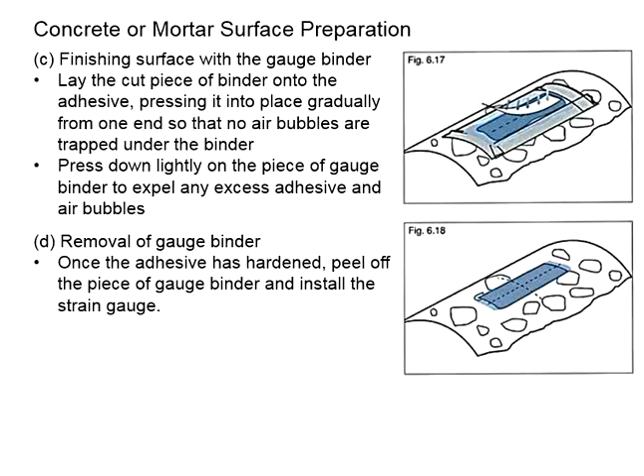Second, you will need to prepare a pre-coating surface on the concrete. We discussed how to apply the pre-coating using PS adhesive in our previous videos. The purpose of the pre-coating is to provide a nice surface for the strain gauge to bond with, and also to serve as a barrier against dampness coming from the surface of the concrete to the underside of the strain gauge.

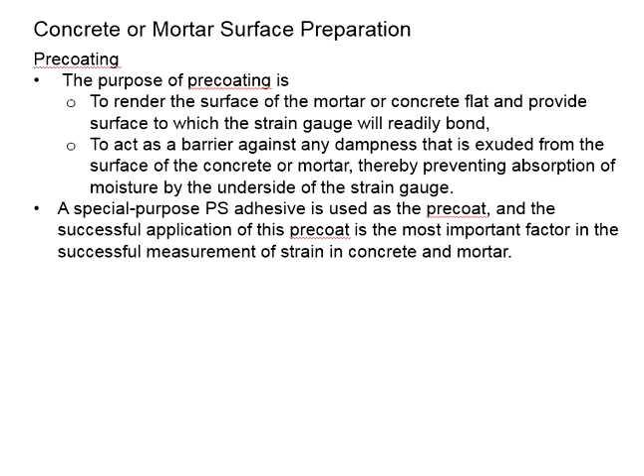This is to prevent the absorption of moisture by the strain gauge. Knowing that you are testing the specimen under outdoor conditions, the specimen is exposed to the environment. As a result, this pre-coating is nearly inevitable. You will have to provide the pre-coating onto the surface of the test specimen.

Now that you have the pre-coating surface ready, you may install the strain gauge using the RP adhesive. Apply a thin layer of adhesive uniformly over the back of the strain gauge, then apply pressure until the adhesive hardens. Next, it will be bonding the connecting terminals.

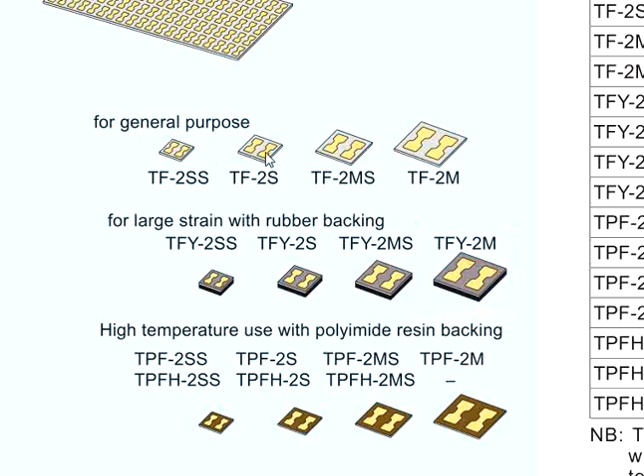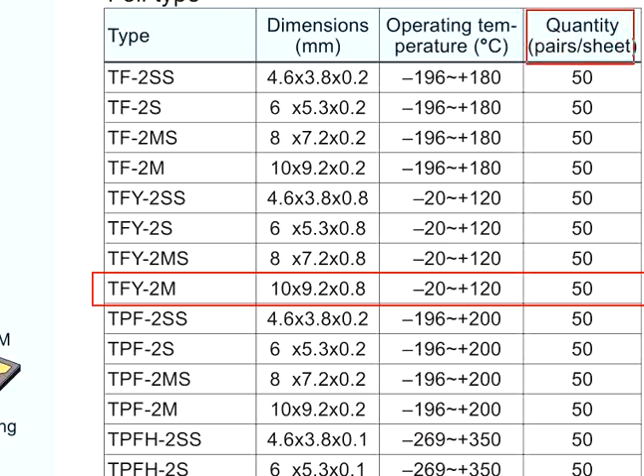If you look at the type of connecting terminal, it is stated as TFY 2M. This TFY 2M is a typical connecting terminal with rubber backing. The dimensions, operating temperature, and quantity per sheet are given here. It normally comes in one piece, and there are 50 units of connecting terminals per single sheet.

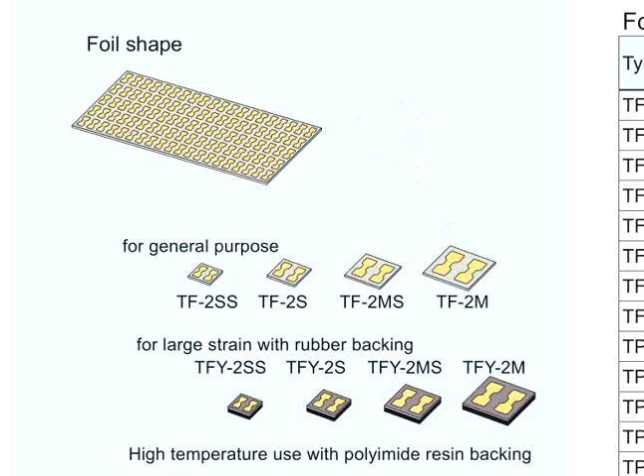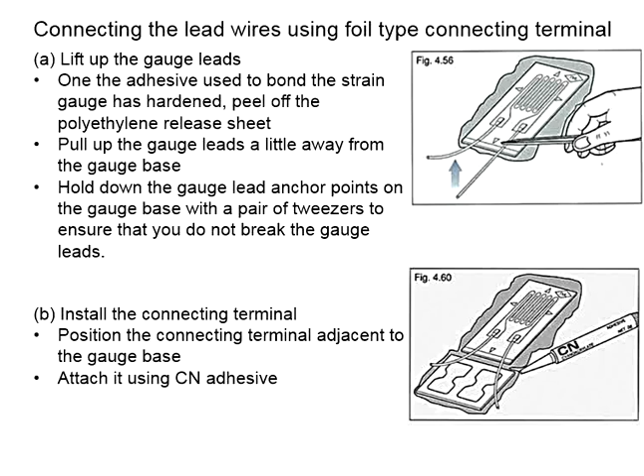Now you need to install the connecting terminals. We have discussed joining the strain gauge with the connecting terminal in our previous videos. You may refer to those videos.

Basically, you may use CN adhesive to have the connecting terminal attached on the pre-coated surface, where you're going to do soldering later, connecting the strain gauge to the connecting terminal, and then joining with the lead wire.

Once you've done the soldering work, you may perform an intermediate check. This intermediate check includes checking the strain gauge resistance using a tester, in order to see if the connections with the connecting terminals are properly done. And then checking the insulation resistance.

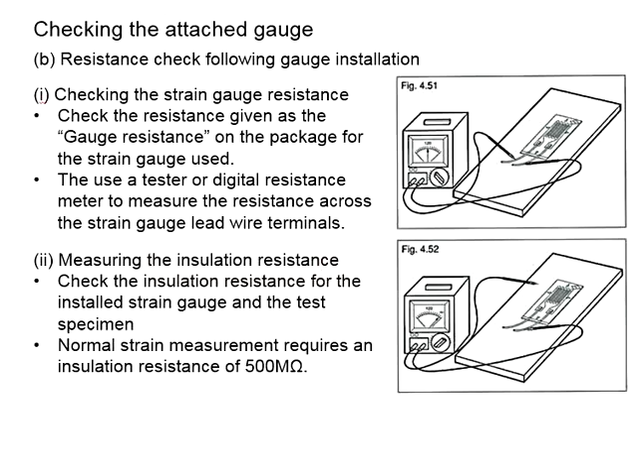Since concrete is not an electric conductor, this shouldn't be an issue. The intermediate check also includes checking the quality of soldering. Do not leave any protruding lead wire. Make sure there is sufficient solder applied onto the connecting terminal, and also make sure all flux deposits are removed. Then check if there are any problems with the connecting terminals.

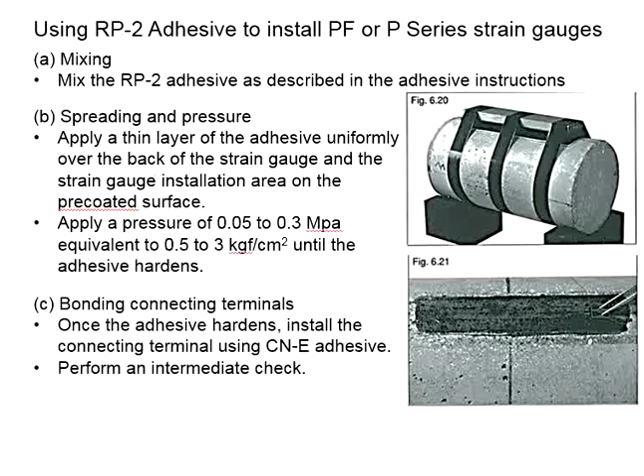Once you've done the installation of the strain gauge as well as the connecting terminals, now you will need to apply coating in order to isolate the strain gauge from moisture.

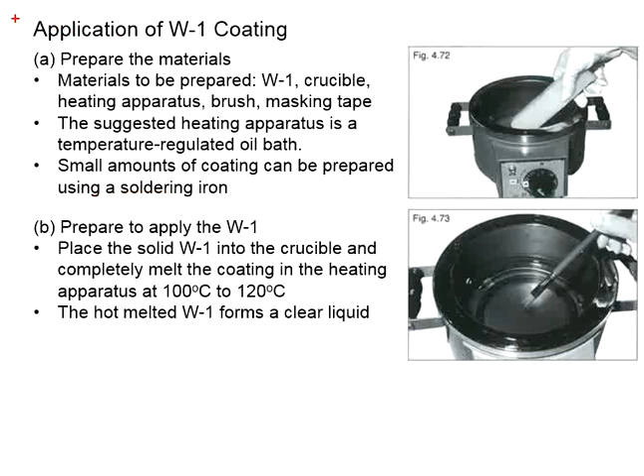You will need to apply the first coating as W1. The process or application of W1 coating we have discussed in our previous videos. You will need to cover this W1 coating over the strain gauge, the connecting terminal, the adhesive, and also the lead wire where it joins.

It is not just only on the surface of the strain gauge, as any part of those, once exposed to moisture, will lead to an influence on the measurements of the strain gauge.

The coating should extend out roughly 5 mm from the strain gauge and the connecting terminal, but should not extend beyond the pre-coating, as the pre-coating prevents moisture coming from the surface of the concrete or mortar. You will have to keep everything in between the pre-coating and the W1 coating.

Let's say now your W1 coating extended beyond the pre-coating. That means moisture can still enter and reach the strain gauge through underneath the concrete surface at the regions without pre-coating, even though you have already applied the W1 coating on top of it. Moisture can still leak through in between the W1 and the pre-coating gap.

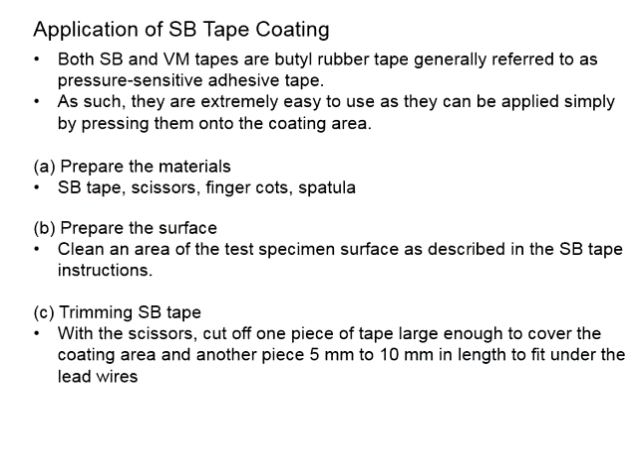Next, you will need to apply a layer of SB tape. We also talked about the application of SB tape coating in our previous videos. The application of SB tape coating should comprise 2 pieces.

A smaller piece should be laid underneath the lead wire, while a larger piece should be laid over the strain gauge, connecting terminal, as well as the lead wire. The SB tape laid underneath the lead wire is very important because this could be the area where moisture can leak into the strain gauge if there is any gap underneath the lead wire.

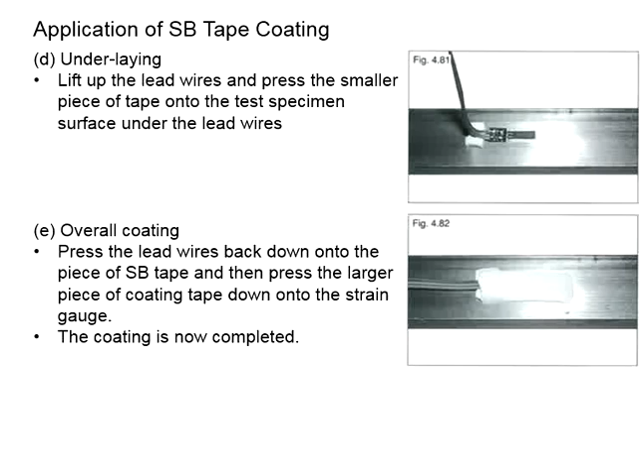Now you cut a piece of SB tape with the size of about 5 mm. Press it down onto the side of the connecting terminal from which the lead wire extends. Then you may do some soldering of the lead wire to connect it to the connecting terminal.

As you have already applied W1 over the connecting terminal, theoretically it has already been coated with W1. It doesn't matter, as W1 coating is sensitive to temperature. Under high temperature, beyond 60 degrees Celsius, it starts to liquefy. You may do the soldering over the W1 coating on the connecting terminal, and it should easily melt during the heating of the soldering iron.

After you're done soldering, you may reapply the W1 coating. If there are any portions of the lead wire or connecting terminals not covered by the coating, you may reapply a coating of W1. Once you've done the coating for the W1, you may use the SB tape to cover up everything.

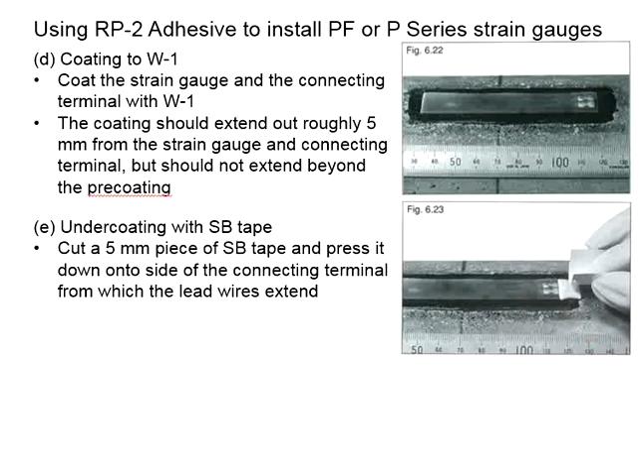Reapply a few layers of W1 coating and then cover everything with SB tape. Make sure you have a smaller piece of SB tape also underneath the lead wire, which you can prepare upfront before you do the soldering process.

Now you have covered everything with SB tape. You will need to provide a final coating by using the VM tape. You will need to cut a piece of VM tape slightly larger than the layer of SB tape coating and press it down in place.

Again, the VM tape will have to come in one whole piece instead of several smaller pieces. This is to ensure there is no gap or joint in between different pieces of VM tape, and properly press it down in place so there is no gap for possible leaking of moisture reaching the strain gauge. Lastly, you will need to perform a final check.

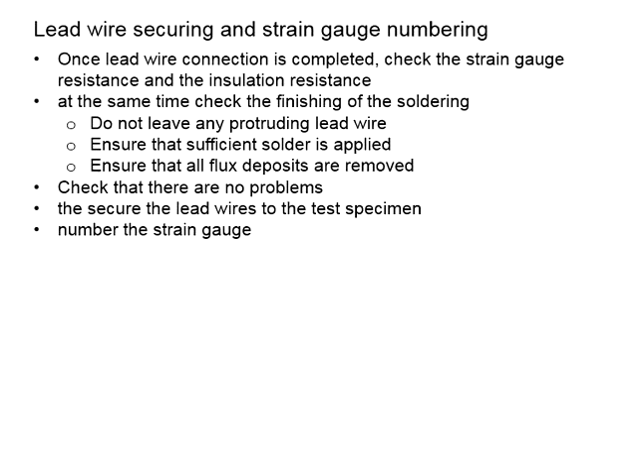The final check will also consist of checking the strain gauge resistance as well as the insulation resistance, and also checking the conditions of the coating, whether it is properly provided. After that, you can proceed with securing the lead wire to the test specimen and also numbering the strain gauge. By then, your installation of the strain gauge on the concrete specimen, which is supposedly to be tested outdoor, has been completed.

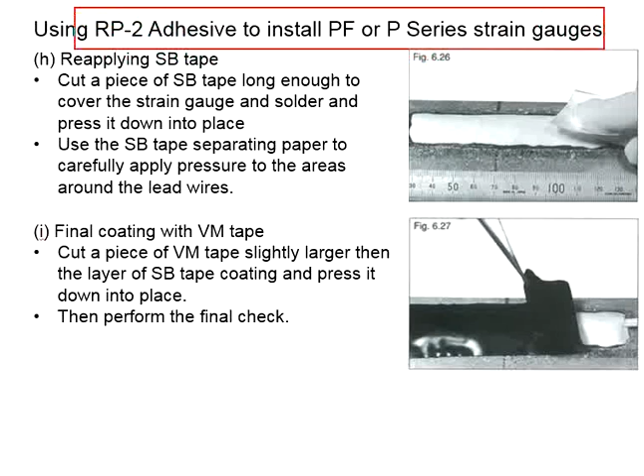What you see here, comparing the installation process of RP2 adhesive versus the process using CN-E adhesive, the main difference will be the testing conditions. If the test specimen is tested indoor, normally we expect that by the time the strain gauge is installed onto the test specimen, very soon it should have been tested. Therefore, you have no issue using CN-E adhesive.

Another advantage of testing the test specimen indoor is the environment is relatively good as compared to outdoors. The indoor testing may not have problems with moisture. Because of this, the coating process is not that tedious. Under some circumstances, even coating is not required for the indoor testing.

Now, if you are testing the specimen outdoors, you will have concerns with moisture. The moisture can come from the environment. It can also seep through the test specimen and reach the strain gauge from the underside. In this case, the pre-coating adhesive is nearly unavoidable for outdoor testing.

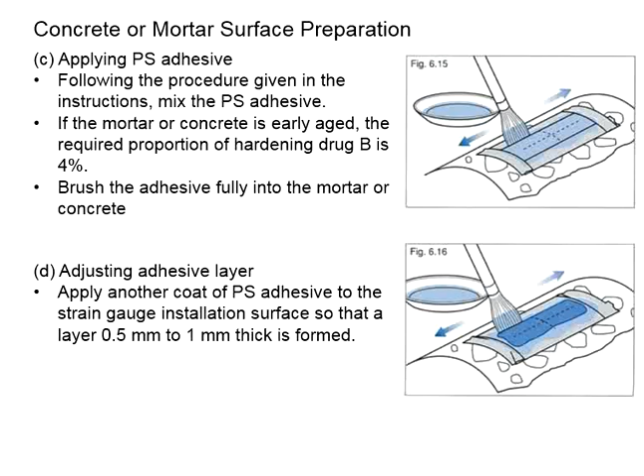You want to prevent the moisture coming from underneath the strain gauge through the test specimen, while at the same time you will need to use a series of coatings on top of the strain gauge in order to prevent direct exposure of the strain gauge to moisture or water.

Since this kind of testing is conducted outdoor, for better confirmation, you may use multi-layer coating. The first layer will be W1 coating, subsequently followed by SB tape, and then the final coating will be the VM tape.

As you are doing the coating layer by layer, the process becomes more tedious and consumes more time, but this is inevitable as you really want good measurements. Otherwise, it defeats the purpose of measuring the test specimens using the strain gauge if it cannot give you accurate readings.

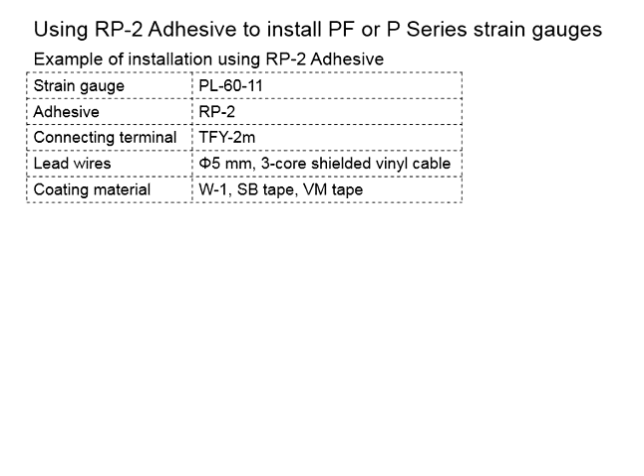Now, depending on the test conditions, the type of strain gauge being used, as well as the adhesive being used, and also whether the coating materials are required, would vary, and every single one of them has their own purposes. Make sure you do it right.